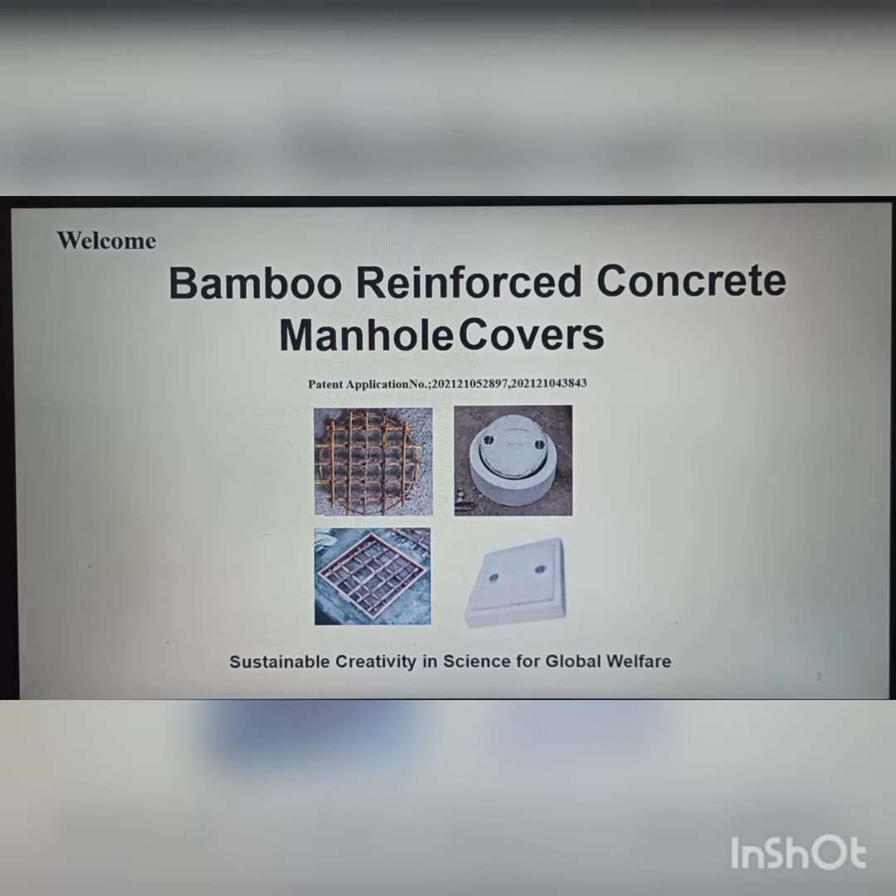This product is a patent applicated product. This is the sustainable creativity in science for global welfare, introduced by Mrs. Sonam Bhopatrao and Dr. Shilpa Kevte, Department of Civil Engineering, Mahatma Education Society's Pillai HOC College of Engineering and Technology, Rasayani.

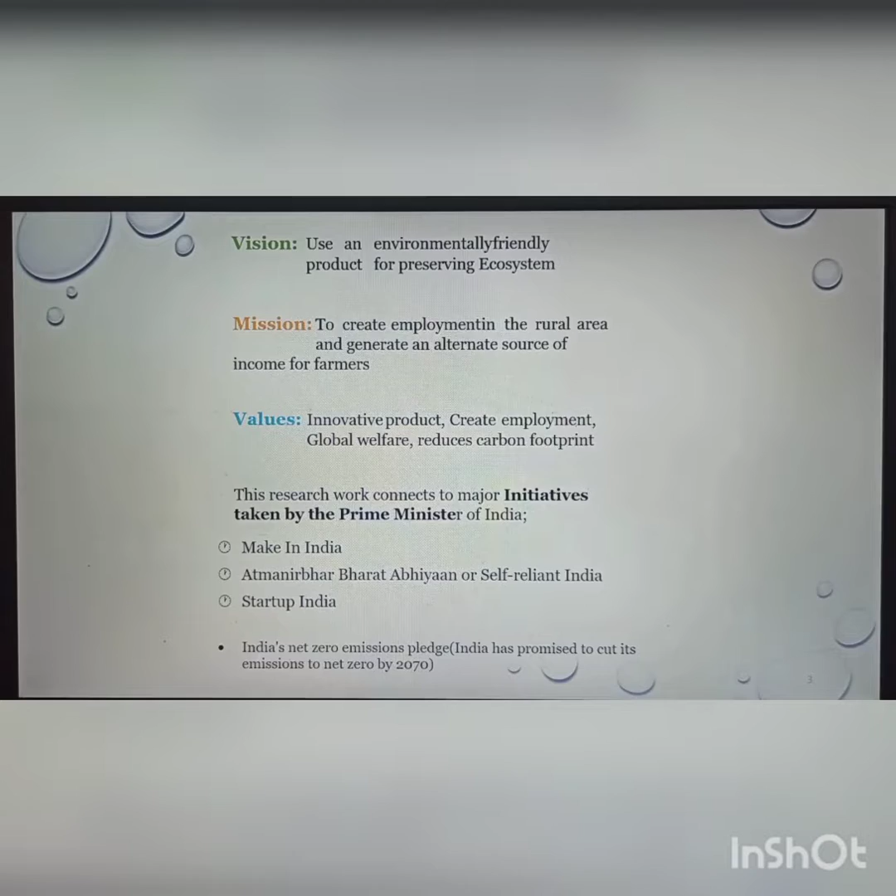Our vision, mission and values: use an environment friendly product to create employment in rural areas. An innovative product creates employment, global welfare, and reduces carbon footprint. This research work connects to a major initiative taken by the Prime Minister of India.

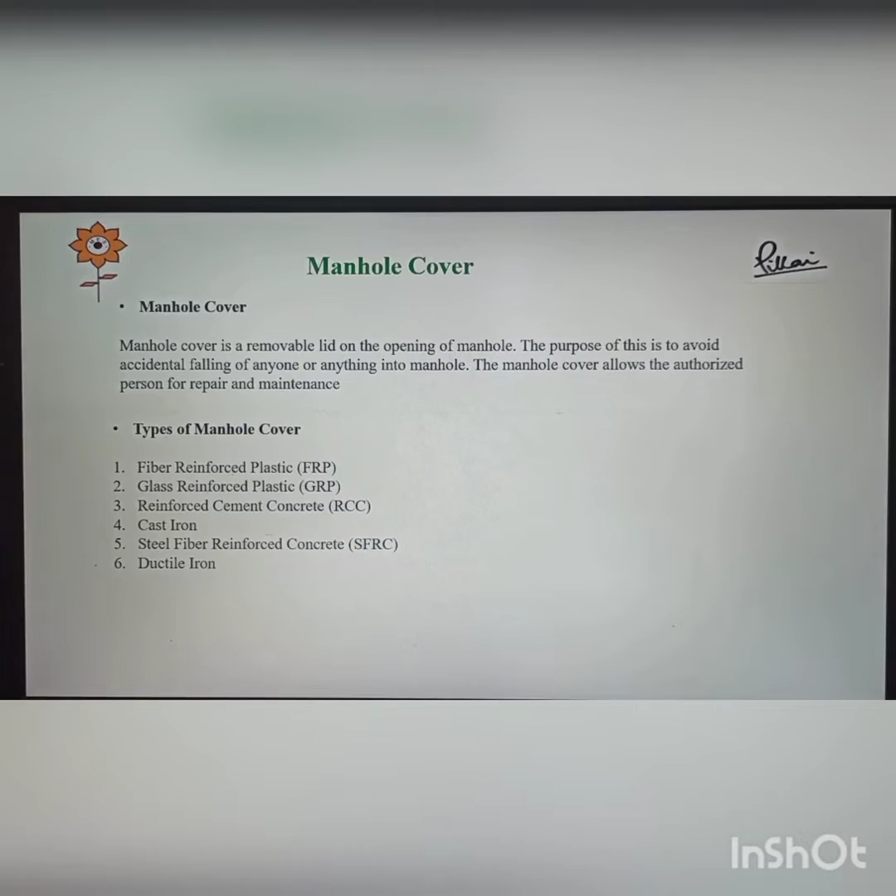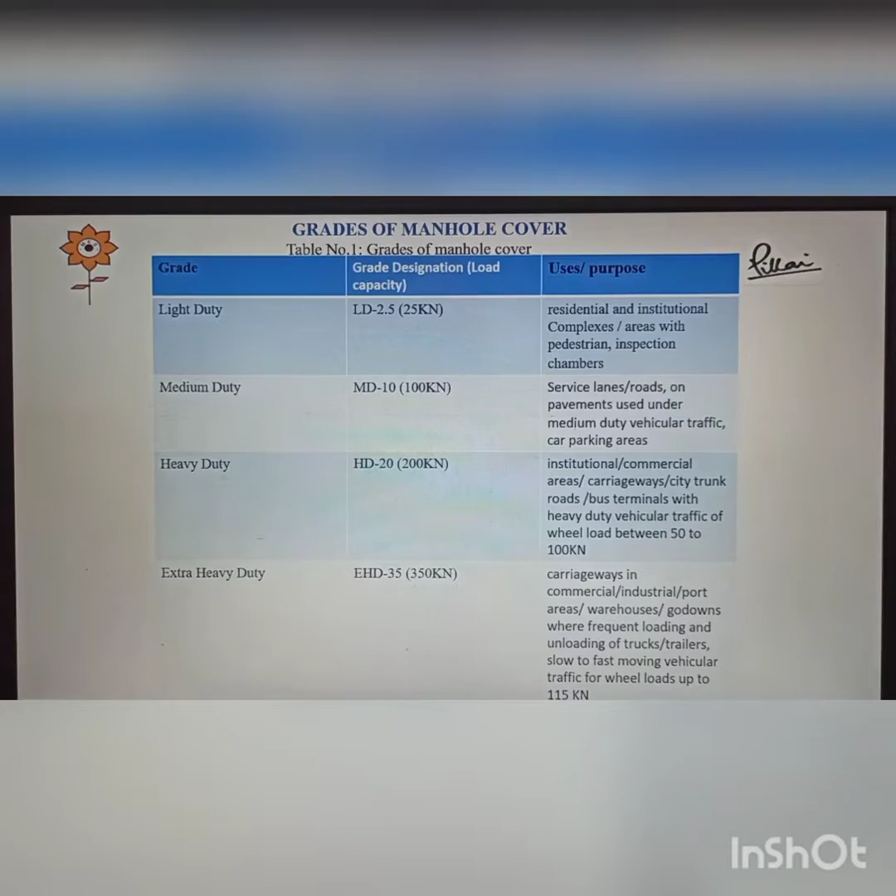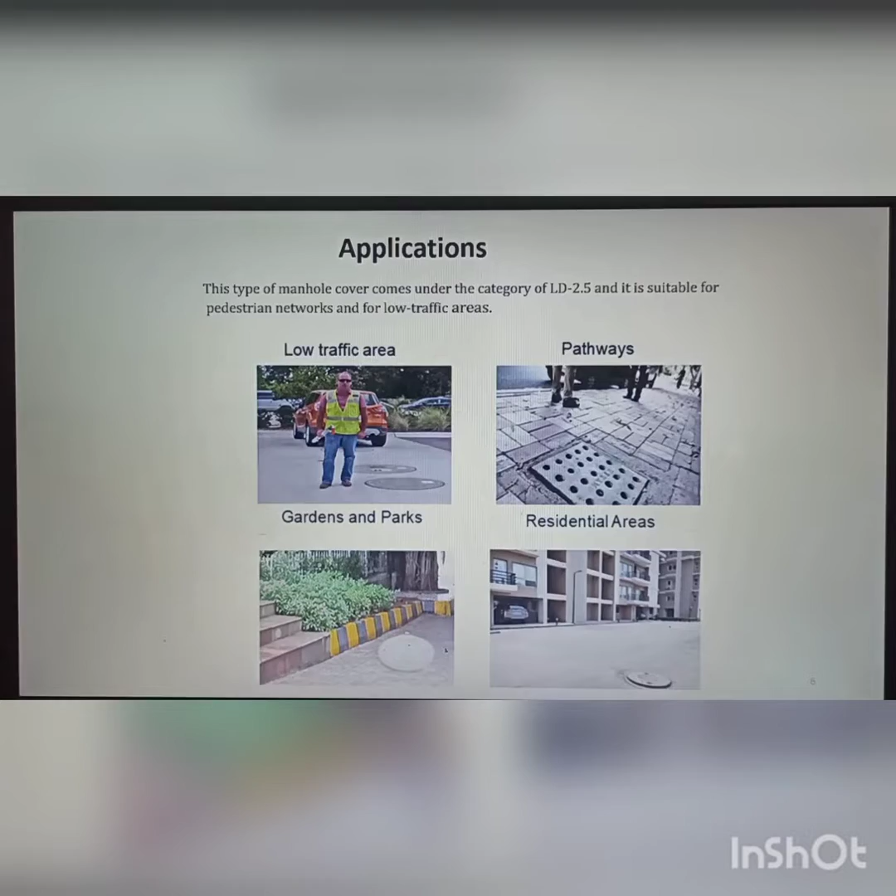Now I will tell you what a manhole cover is. It is a removable lid on the opening of a manhole. This is the grade of manhole cover, and there are 4 types of grades, but for our research work we are using the light duty, that is LD 2.5. This type of manhole cover is suitable for pedestrian networks and low traffic areas, also pathways, gardens, parks and residential areas.

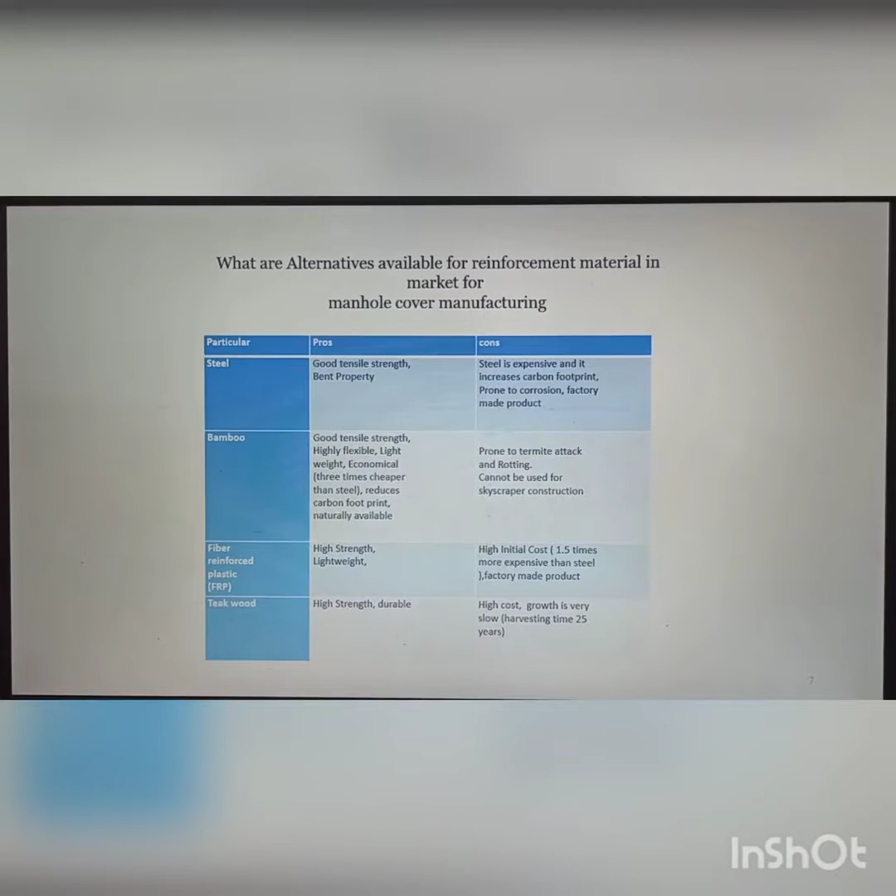There are some alternatives available for reinforcement material in the market: steel, bamboo, fiber reinforced plastic (FRP), and teak wood. Among all these materials, bamboo is a very good and superior material.

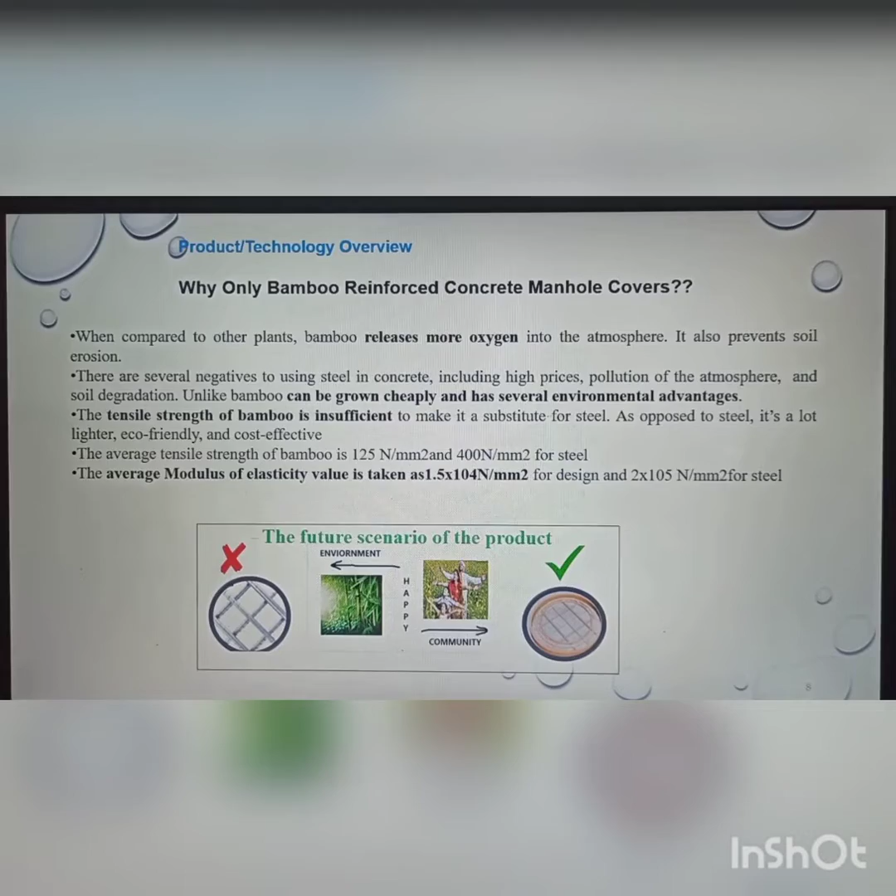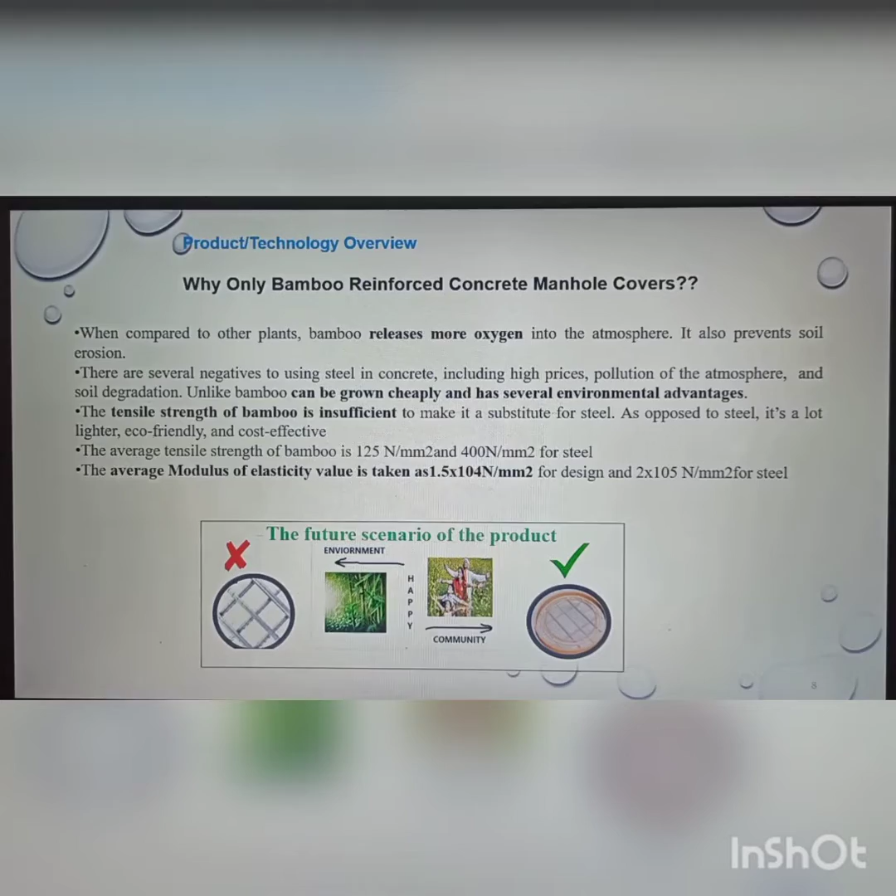So why only bamboo reinforced concrete manhole cover? Because bamboo plant releases more oxygen into the environment. It can be grown cheaply and has several environmental advantages. Its tensile strength is also insufficient, and the average modulus of elasticity value is taken as 1.5 into 10 raised to 4 Newton per mm square.

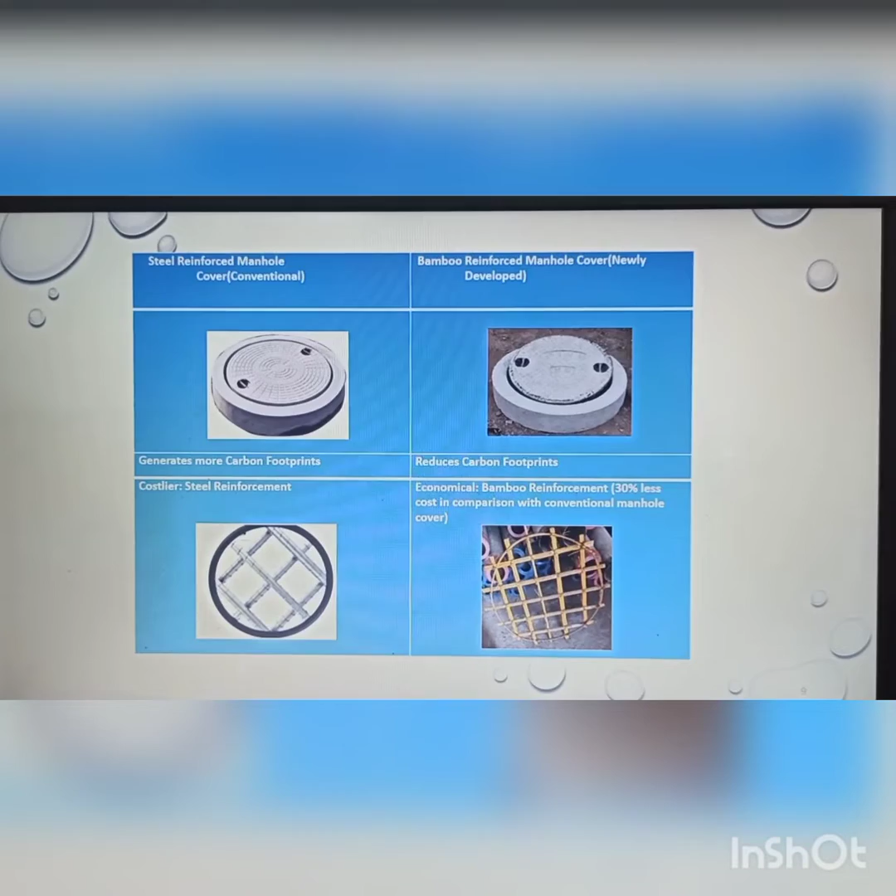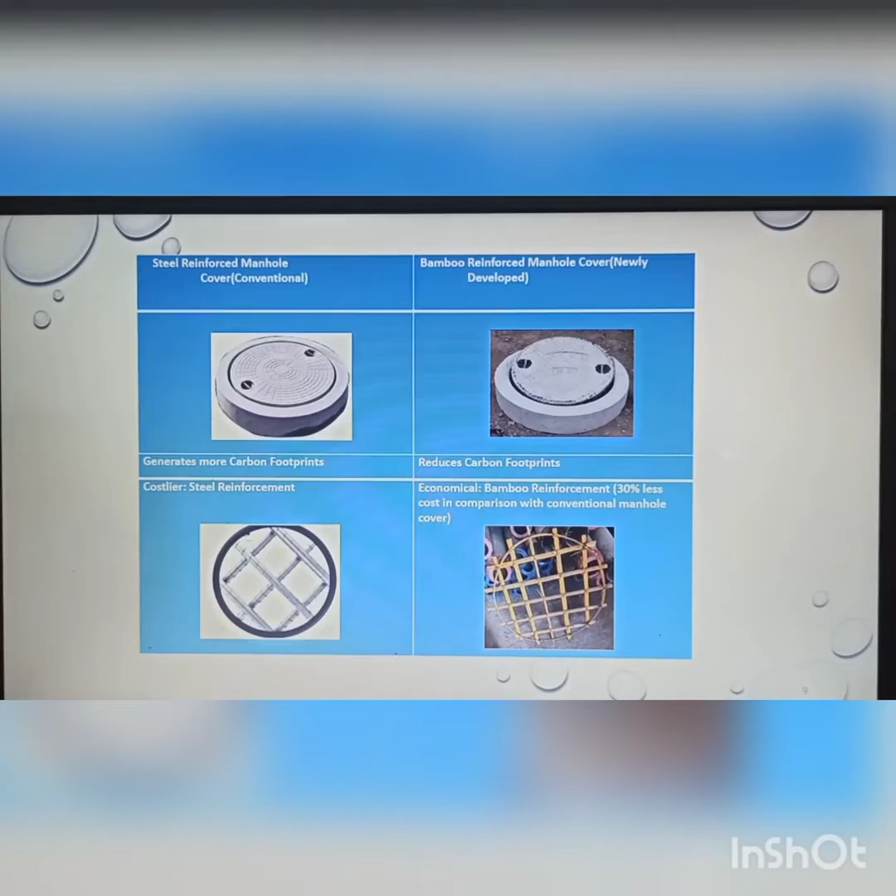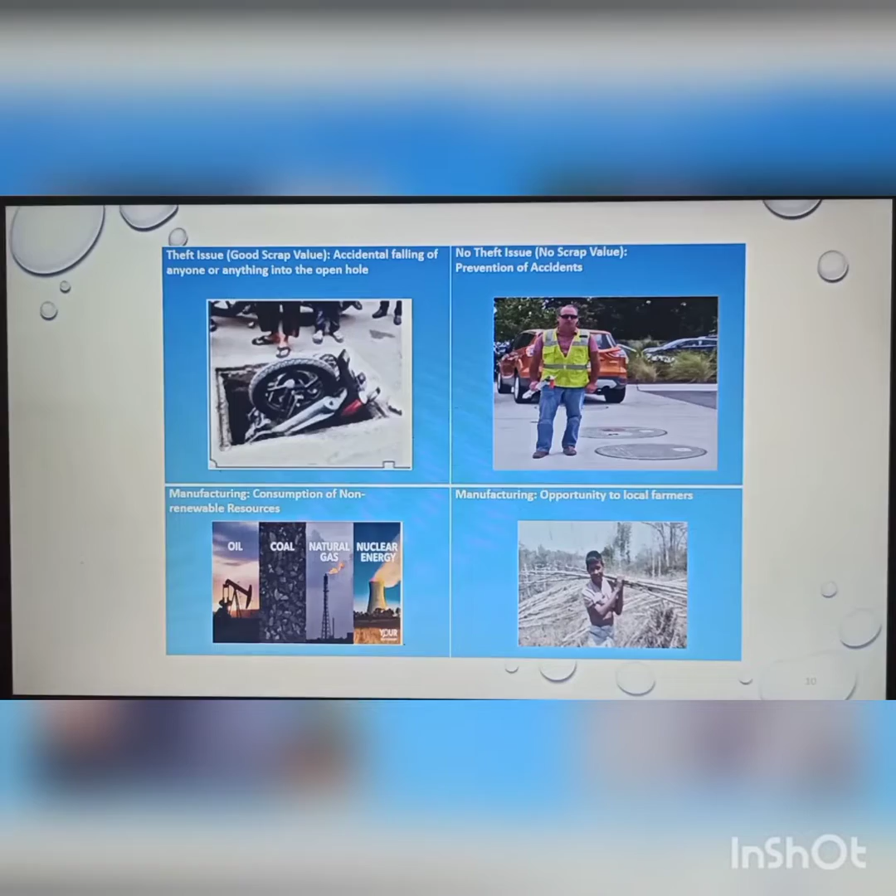This chart shows how superior bamboo reinforced manhole cover is compared to the conventional one. In case of conventional steel reinforced manhole cover, more carbon footprints are there and the cost is quite more. In case of the newly developed product, there are less carbon footprints and cost is also reduced. Theft issue is not present in case of bamboo reinforced manhole cover, and the opportunity is given to local farmers during manufacturing, saving materials like oil, coal, natural gas and nuclear energy.

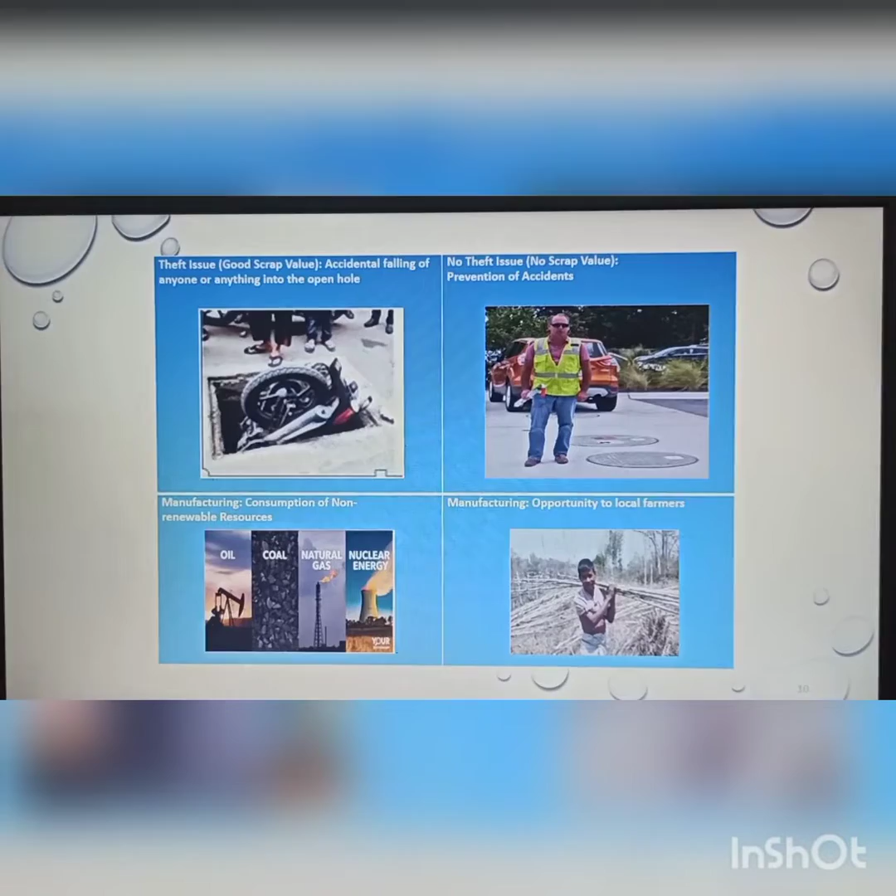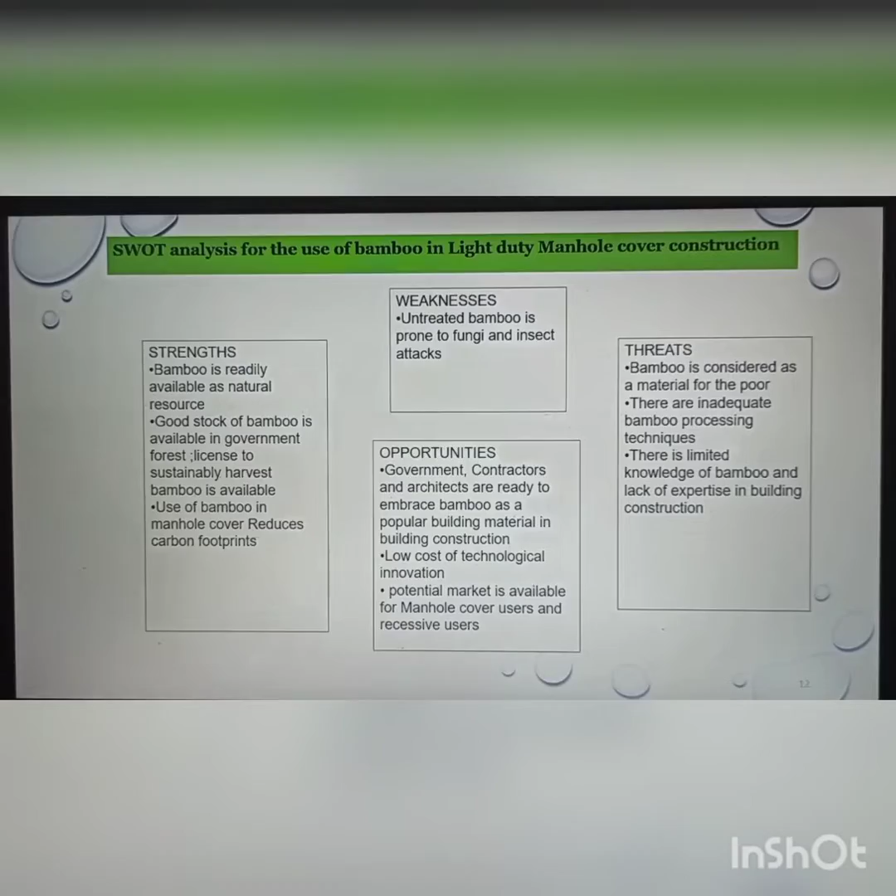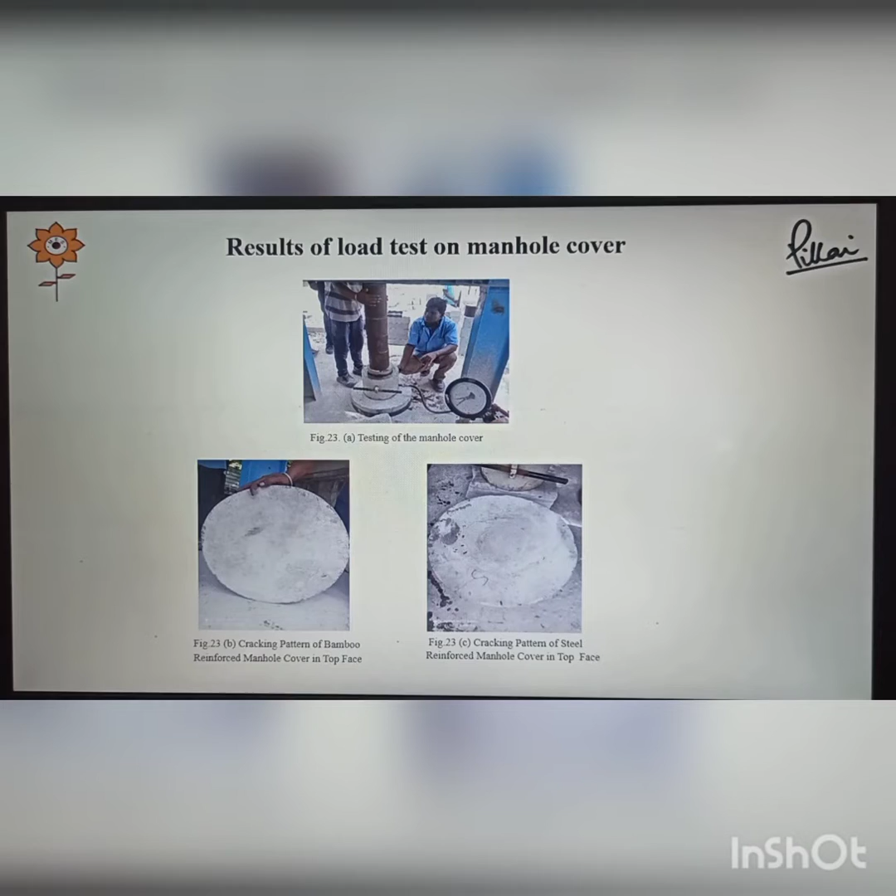Result of load test on manhole cover: this bamboo reinforced manhole cover is tested from a certified lab. We can see in this diagram the test setup. Then this is the chart showing the load test results.

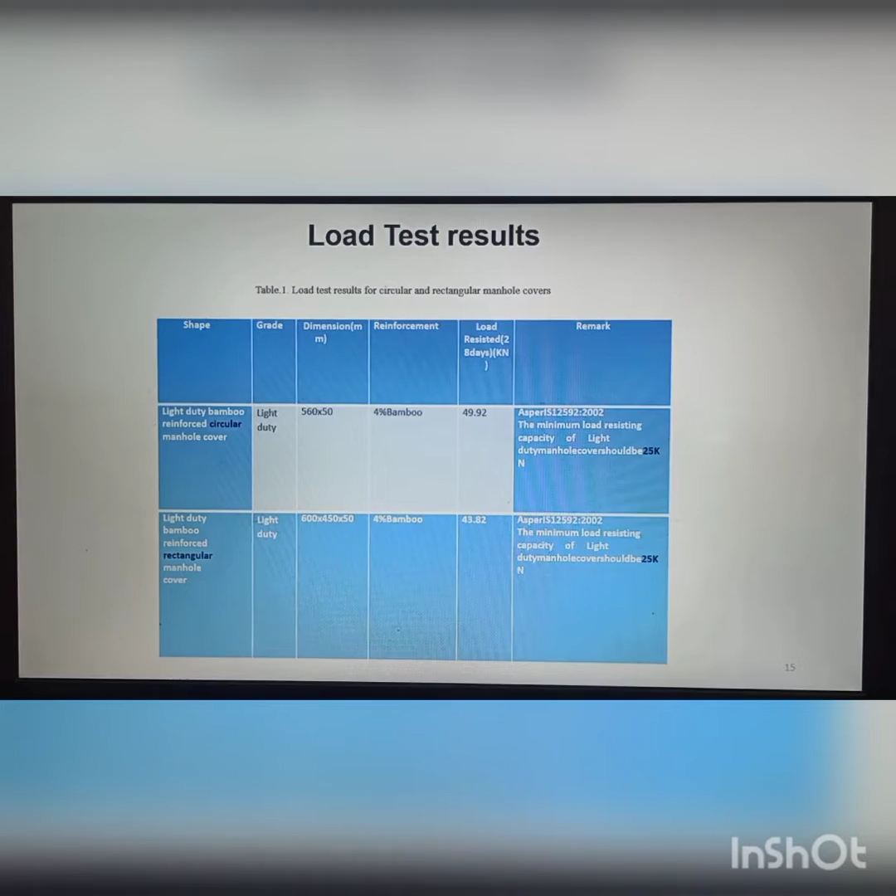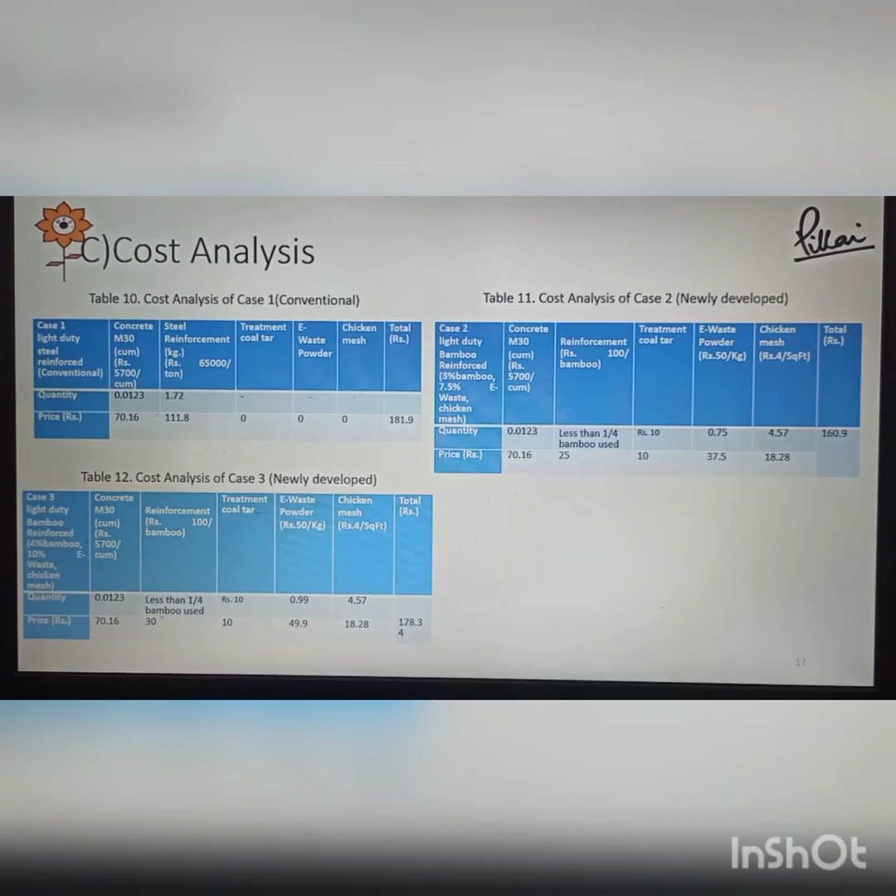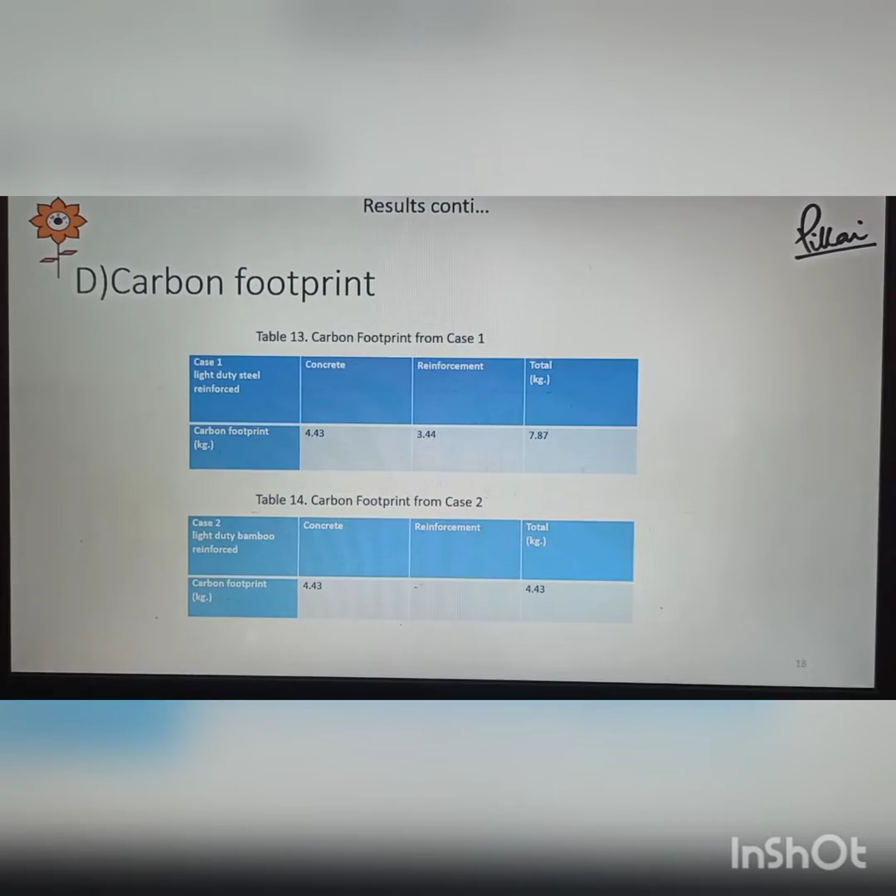Cost analysis is also done for the newly developed product. We can see from these charts the cost is quite less than the steel reinforced manhole cover. Then carbon footprint analysis is also done. In case of steel reinforced, 7.87 kg carbon is emitted, and in case of bamboo reinforced manhole cover, 4.43 kg carbon is emitted into the environment, which is quite less than the steel reinforced manhole cover.

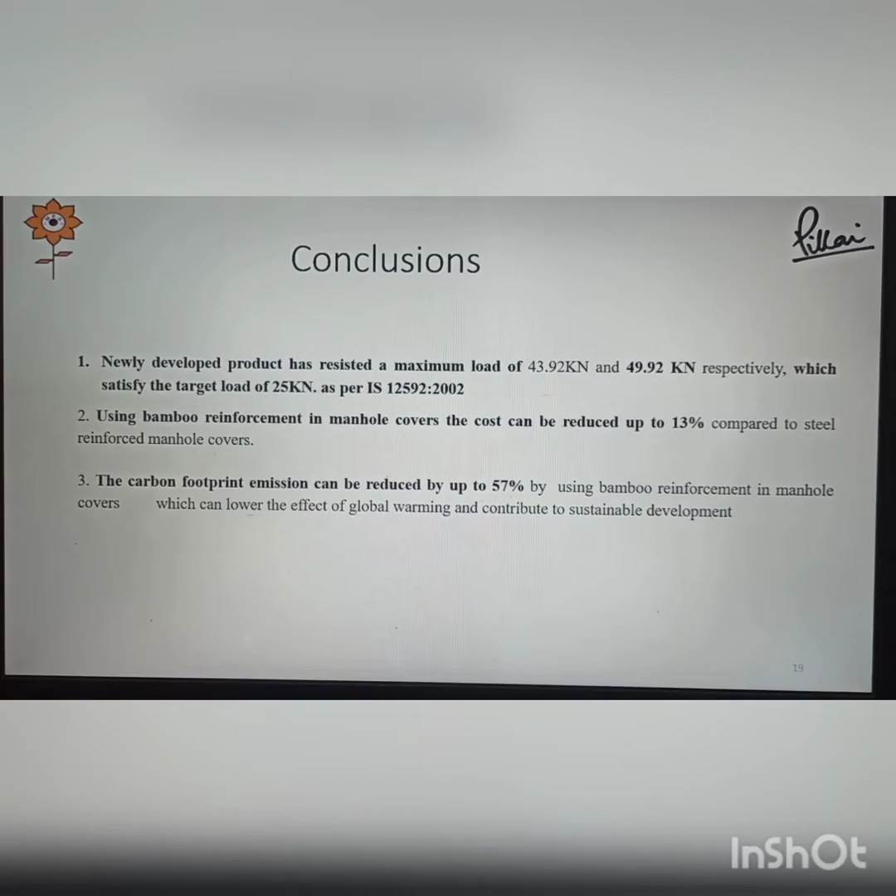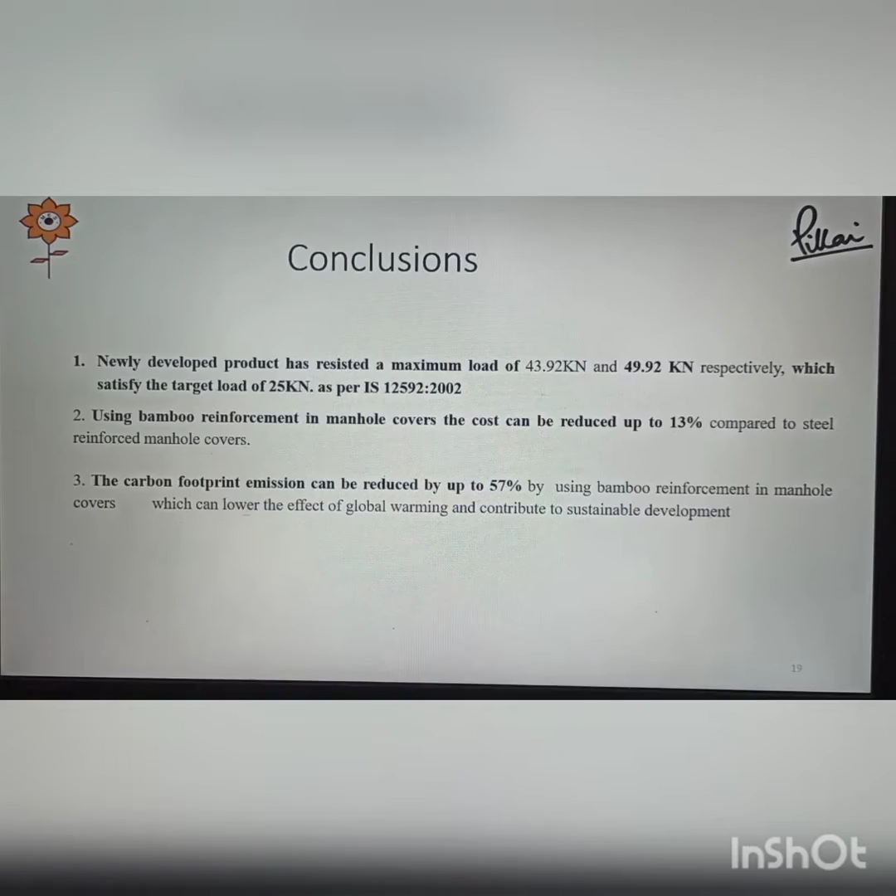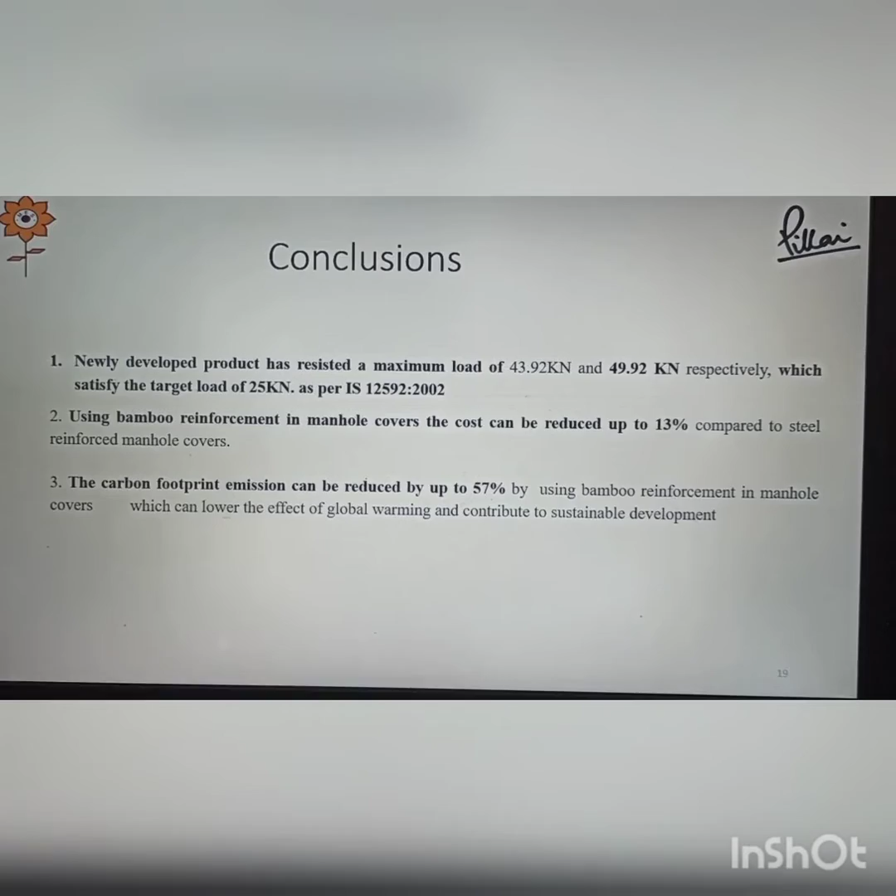Conclusion: the newly developed product has resisted a maximum load of 49.92 kN, which satisfies the target load of 25 kN as per IS 12592-2002. Using bamboo reinforcement in manhole covers, the cost can be reduced up to 13%. The carbon footprint emission can be reduced by up to 57% by using bamboo reinforcement in the manhole cover.